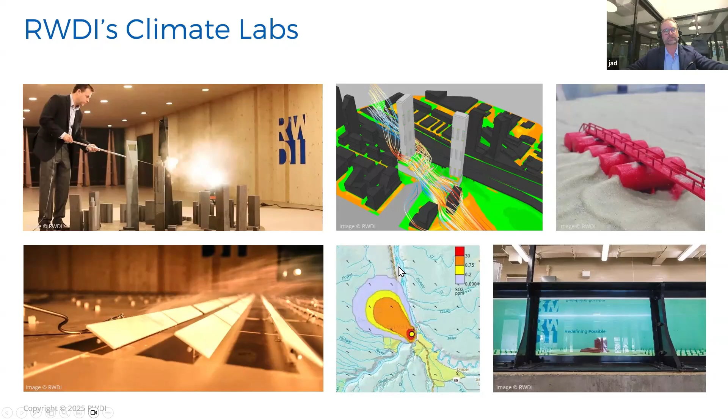Different areas of expertise under RWDI, highly sensitive to topography. This is actually emissions pollutant dispersion being modeled at a beyond the microclimate scale. This is up at probably around 10K by 10K.

We've done a number of research stations there looking at wind and snow accumulation and drift and so forth.

We have offices in Canada, the US, the UK, and Asia Pacific. The wind tunnels, or climate labs, are located in Guelph, Ontario, Canada. There are three of them at that facility, plus a water flume, so four major instruments in Guelph, just west of Toronto. We also have another facility with a wind tunnel to the northwest of the city of London.

That's in Milton Keynes. And then we have one tunnel, and we're building another, perhaps two, in Trivandrum in the south of India. We are working every day of the week all over the world.

To give you a sense of the scale of project work that RWDI does in our areas of specialty, we do thousands of projects per year. Our scope is smaller, narrower, as specialists than say the architectural design or the structural design. We are called upon for our specialties at a variety of places throughout the project, but it means we do a very high volume of projects throughout the year.

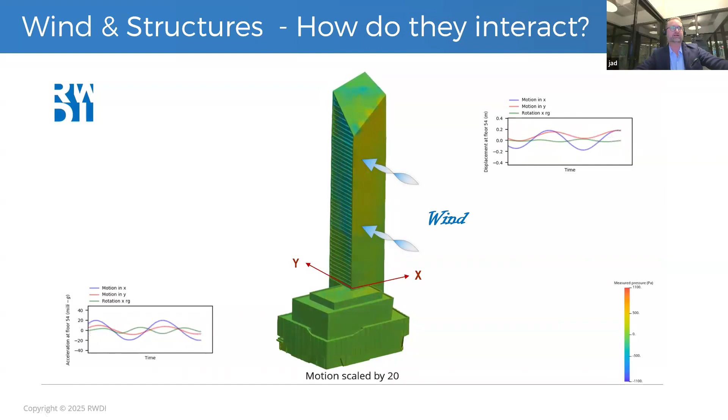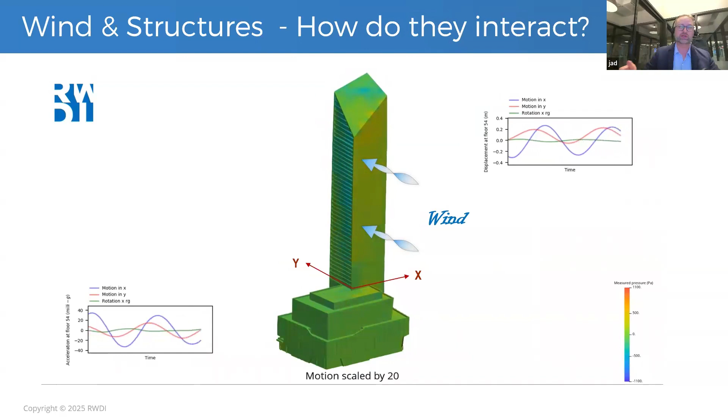This is an image where the motion of the building is actually magnified by a factor of about 20, but it is really important to understand these buildings that we build, they do move. They do experience wind loading. Yes, there's dead loading, yes there's certainly seismic loading, but often, and for many projects around the world, wind loading is one of the critical loading parameters, and it is important to understand the way that it interacts with a structure and the way that the structure will respond to that loading, including that buildings move.

Now, the building code, I'm specifically referring to North American codes here, but it's pretty well true the world over, has guidance for structural engineers on how to assess wind loading or cladding pressures, either of them. It is a relatively generic approach. It is a little bit conservative, and it's important to understand the context where it is most applicable.

It is most applicable in the along wind direction. So wind coming from the left side of the screen, moving towards the right against my structure here in plan view, and you can imagine a code that says it pushes on it and then the building responds. So you get this along wind response.

But for many structures, it is actually the across wind that is the governing load. It is the largest load at the appropriate frequency, and it is the thing that will be most impactful for design. Now, the thing on the bottom here is just a general rule of thumb. I'll show you some other rules of thumb later, but it is most typical that the across wind vibration, the across wind motion and forces are stronger at heights greater than 120 meters.

It can be true that that is lower, it can be true that it ends up higher. It depends on a whole range of factors like the surrounds, the particular climate that you're looking at, the aspect ratio of your particular building. I mean, we have done plenty of work on crosswind dominated buildings that are nowhere near 120 meters tall.

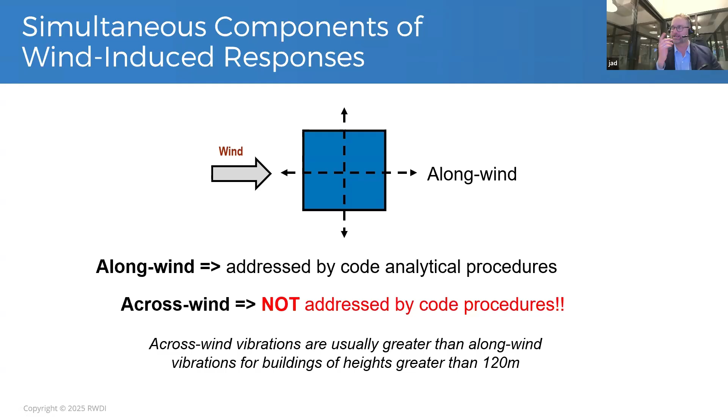But there is a role, I think, for the practicing structural engineer to be thinking about: how much vulnerability do I have here? And does the code give me a good representation of what my building will actually experience? To try and understand what it is that is driving that crosswind response, here is wind coming out of the left.

This is a large eddy simulation, CFD, just for the purposes of understanding the phenomena that is at play. Wind pressure builds on the front side, and you get some positive pressure and displacement in the along wind direction. But what emerges is a vortex shedding phenomena.

As I play the video, you can see the alternating eddies that come off as vortices. What that manifests on the building is actually a stronger crosswind response than an along wind one. So the building is being pulled and pushed up and down on this screen more than it is being pulled and pushed left to right.

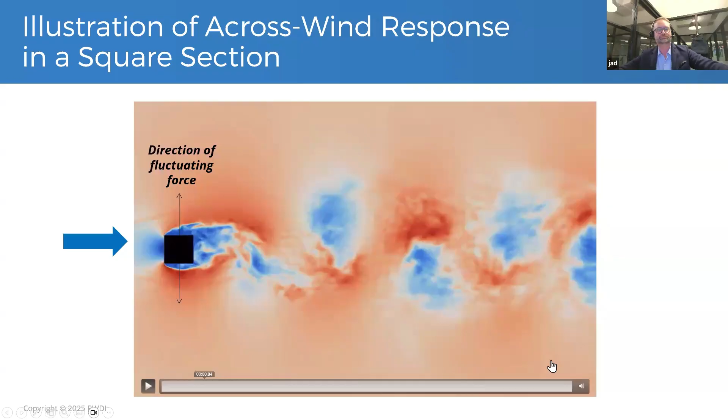To give you a sense of what that looks like when we do an aeroelastic model of it, this is a design iteration of the spire that sits on top of the Freedom Tower here in New York. This was an earlier design iteration, and you can see our tunnels are a little dated here, this is one of our older facilities. The newer ones are prettier, but this is a really, really good video, even if the tunnel looks a little dated.

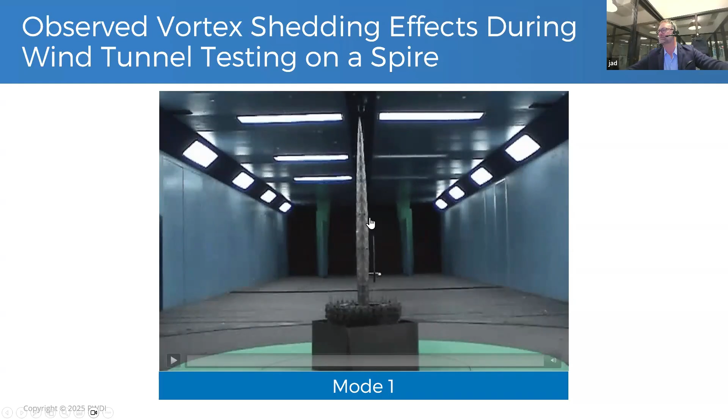So you get a sense of it, I don't know if the audio came through, it just sounded like a wind tunnel. But if it did come through, then that's what it sounded like. That was just a physical manifestation in a non-rigid, aeroelastic model, showing exactly that crosswind response as measured in the tunnel.

So why would we want to conduct wind tunnel tests in order to study these loads? Well, wind loads are notoriously difficult to predict. You think about the compass, there's 360 degrees of potential direction. There's turbulence in the air naturally, so wind passing by is not a pure linear function. You have boundary layer conditions, including the roughness, i.e. the other buildings that might be around your building, or topography changes, etc.

The buildings that we design now in the world are complex in terms of their building shape. There are some rectilinear prisms out there, but there's also a lot of bends and curves and shapes and sails and all sorts of things.

Interference effects from immediately surrounding buildings are important. So if you think back to that image I showed with the vortex shedding, if you are the building that is downwind of said building, you're experiencing the effect of your neighbor.

Complexity of upwind terrain - the terrain conditions are not so complicated somewhere like New York, but if you go to Hong Kong, that's a different story.

Complexity of dynamic behavior under wind load action is a lot about the actual properties of the design and the crosswind response that I showed. There is a lot of inherent conservatism to cover all this risk. The code is inherently relatively conservative, and so there is an optimization opportunity here, in addition to a risk management opportunity.

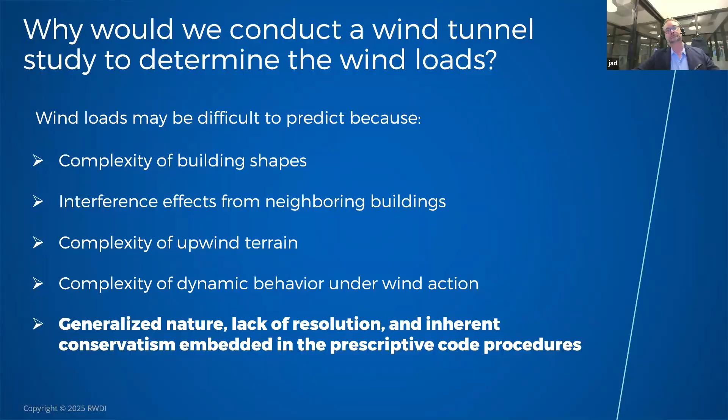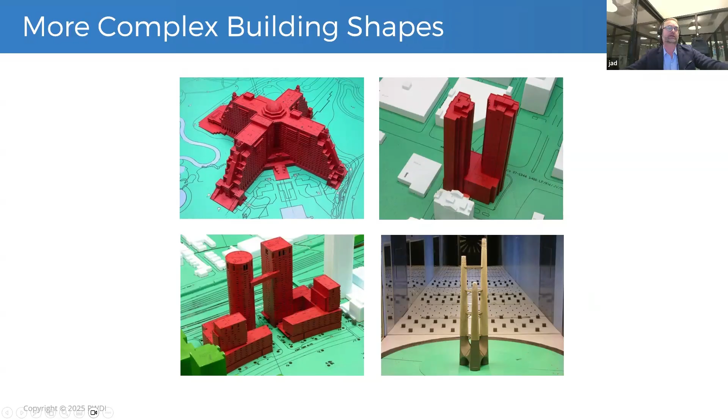We see all sorts of shapes and sizes: bridge interconnections, very squat type buildings, and a lot of pairing of towers coming these days, which may or may not be a singular structure. They can sometimes be completely isolated from one another, although they look like they're together, but these things can interact or not. In the case of the one on the bottom right, that absolutely will interact with one another. So you're really working on a problem with three independent bodies with connection, and their behavior in the wind can be as complicated as you might guess it to be.

All sorts of different shapes - these are again a few from some of our older tunnel facilities, but we've been privileged to work on some really incredible towers, some of which have been built, certainly Burj Khalifa. This one I can tell a little story on, but some of the others, Petronas Towers for sure, and this guy is Atlantis. All sorts of stuff comes through our tunnels. Some of it gets built, some of it doesn't, some of it goes back to the design drawing board.

Burj Khalifa is a fascinating story. Bill Baker was one of the engineers involved, really leveraging the output of a wind tunnel to inform the shape and orientation of the tower.

All of these setbacks built into the tower are mechanisms that, in addition to making for interesting architecture, create different sectionality in how wind interacts with the facade. You're breaking the aerodynamic profile into sections so you get a different frequency of vortex shedding depending on which part of the tower you're looking at. You're essentially confusing the wind, as opposed to something like 432 Park Avenue here in New York, where you have a rectilinear prism with essentially the same cross section regardless of height. So there's serious aerodynamic advantage to this shape.

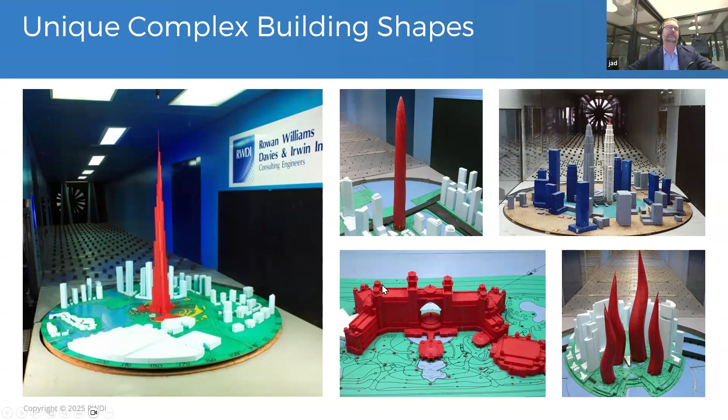Wind tunnel studies we do for all sorts of buildings. We also touch on pedestrian level wind, I'll come back to that, but often we're doing structural wind load studies for buildings, particularly tall or slender ones, and a lot on long span roofs. These are areas where code is often challenging, especially with complex shapes. Architects are increasingly coming up with interesting shapes and sizes, cutaways, overhangs, amenity spaces high up in the air. So the demand for dialed-in structural loads and cladding pressures is becoming ever more important.

Aeroelastic testing we don't do all the time - a lot of our work is based on rigid models. But when you have a highly dynamic building or a particular amenity or feature, like what I showed you on the spire for the Freedom Tower, we will actually build aeroelastic models.

These are models designed to move, but designed at model scale and deployment to have the characteristics at full scale of the structure - things like stiffness, mass, and so forth. We try to emulate the design characteristics at model scale and then test on that basis. All of our bridges, cable bridges, suspension bridges, and even some of the more rigid ones, we will build aeroelastic models for given the potential for movement.

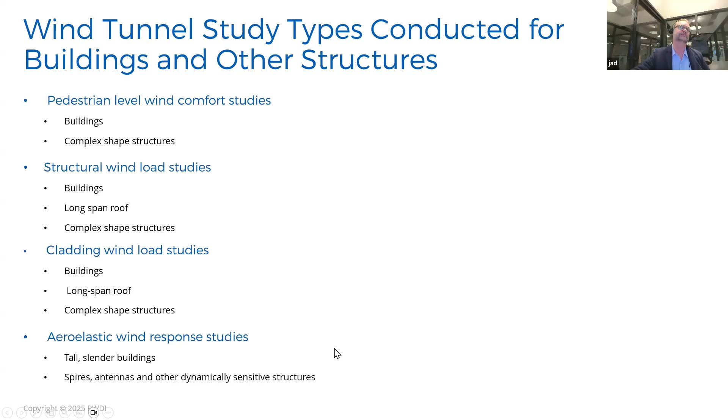The way the wind tunnel works: one of the primary instruments that goes in the tunnel are flexures - a sway flexure and a torsion flexure. Essentially these instruments measure the amount of force being imparted by the wind, and they measure it over time so you get the fluctuations and movement and so forth.

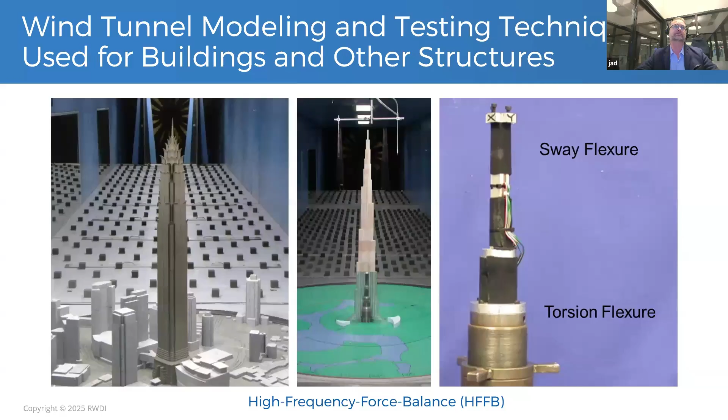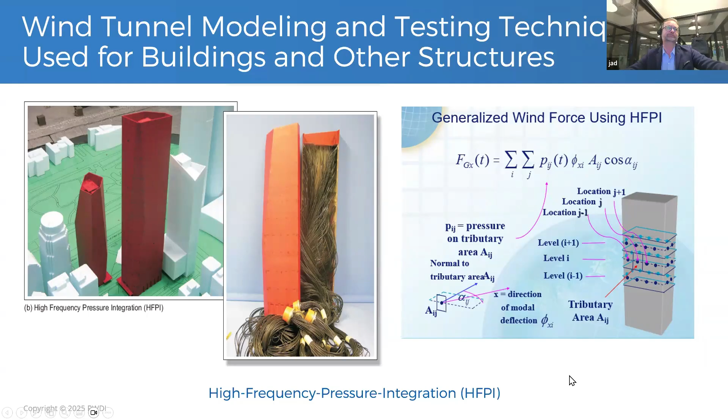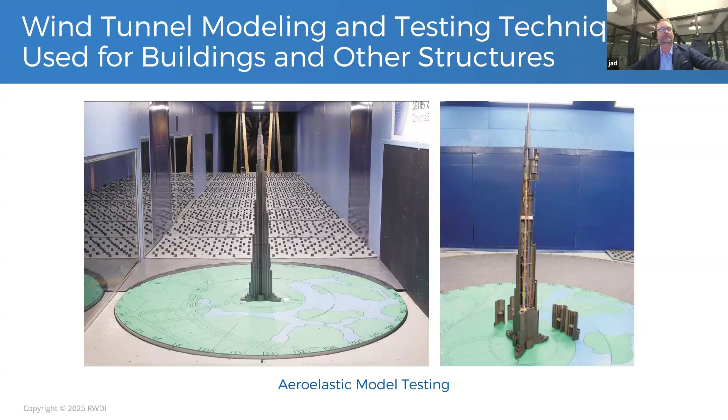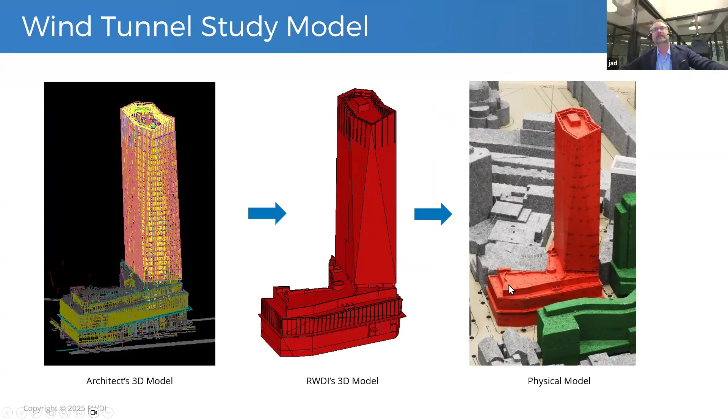Aeroelastic model testing - sometimes we do very large aeroelastic models where we're capturing that stiffness, capturing that mode shape at model scale, and then testing as such. The workflow usually goes: an architect will send us a 3D model. It usually has way more than we need for our work included, but our job is to clean that model and get it ready to go into our model fabrication, where we build the physical model, instrument it, and place it in all of its surrounds so that we can put it in the wind tunnel and do the tests.

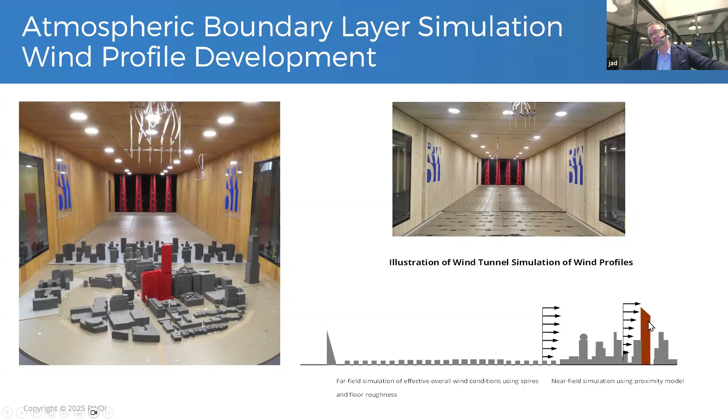That would be different if, let's say, I'm down in the Financial District in Manhattan. If I was any of the towers directly on the water, for the right wind direction on the test, I will want a fairly smooth surface leading up. If I am deep into Midtown, but only have a portion of Midtown on my horizon, I will want some additional roughness to represent, say, the wind direction coming down from Central Park through all of the super tall towers, even if my project is down, say, 34th Street or something like that.

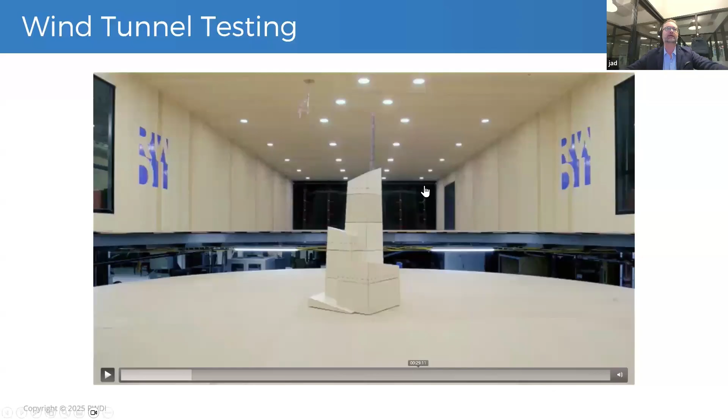This is a model being loaded into our newest and largest wind tunnel - a 24-foot tunnel. The disc that you can see is fabricated beforehand. Sometimes it'll have buildings, sometimes we're studying something in isolation. We're loading it into the wind tunnel from below, and the fans or the wind will originate from the end of the screen. Then we'll be able to spin the disc as we look at all the different angles of study.

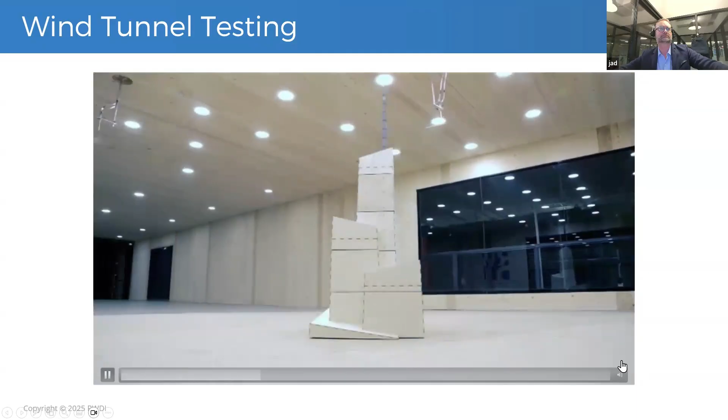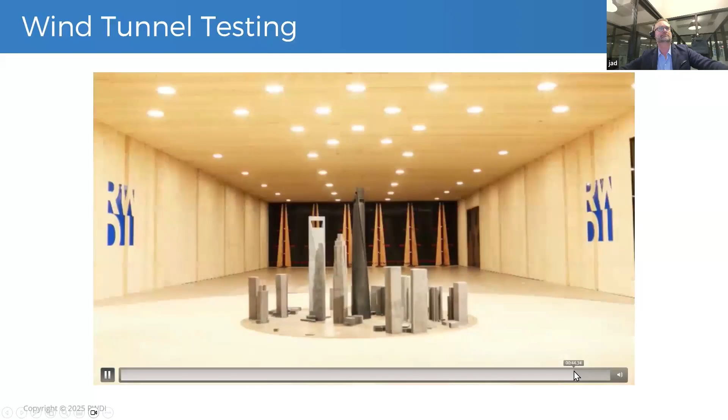A summary of the steps involved in a wind tunnel test: it's assessing the surrounding terrain, understanding what the profile should look like. It's evaluating the local wind climate - it matters what directions the wind comes from and how often, in addition to how strong that wind is likely to be. We build physical models, sometimes aeroelastic, sometimes rigid, of the specific building itself. We test it in the wind tunnel, going all the way around every time. We record and process all of that data, and the raw data that comes out is massive - massive data files - but we have to compute them all down into things that are tangible and usable by the teams we're working with. And we have to be able to communicate what it is that we do.

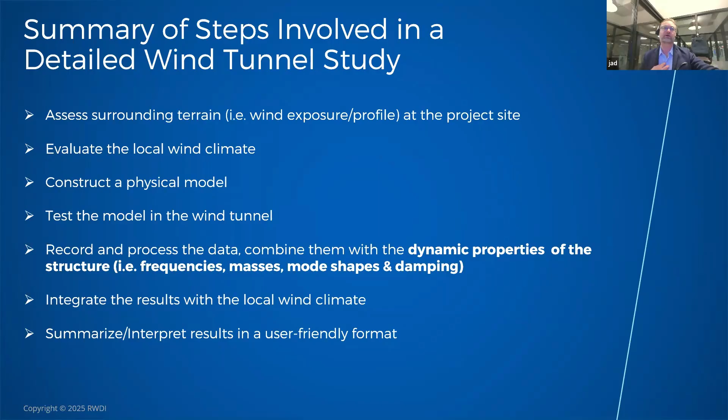There are a lot of structural professionals, developers, architects, etc., who are familiar with wind tunnels and wind tunnel work, but there's quite a few who are not. They have to learn how to work with the material that we provide them, and we have an obligation to provide it in a friendly format that they will know what to do with.

Typical parameters - we certainly talk about forces and moments and things like that, but we also increasingly talk about serviceability criteria. That means, what is it that we are expecting to provide for the building occupants? Knowing that these buildings will move, what is an acceptable amount of movement and how does it express itself? The most commonly used motion comfort criteria, serviceability criteria, are measured in milli-g's for residential, hotel, and office types.

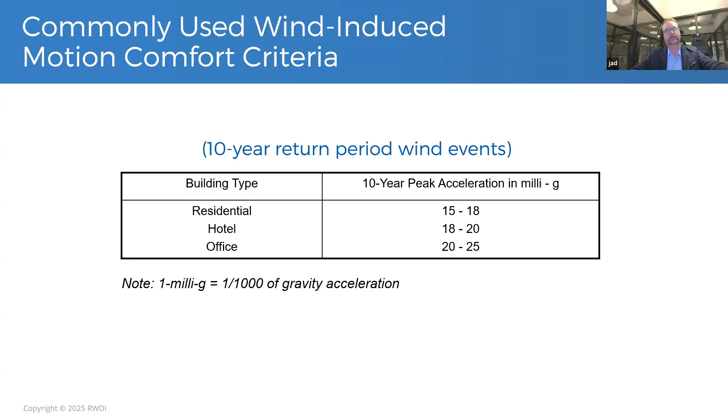Increasingly, there is an emphasis not only on the 10-year event, but to have a more frequent threshold. So one of the sets of criteria that we recommend is a 1-year event that's consistent with ATC Design Guide 3, but looking not only at the 10-year serviceability, but increasingly at the 1-year. In some projects, we actually look at a more frequent parameter than even 1 year.

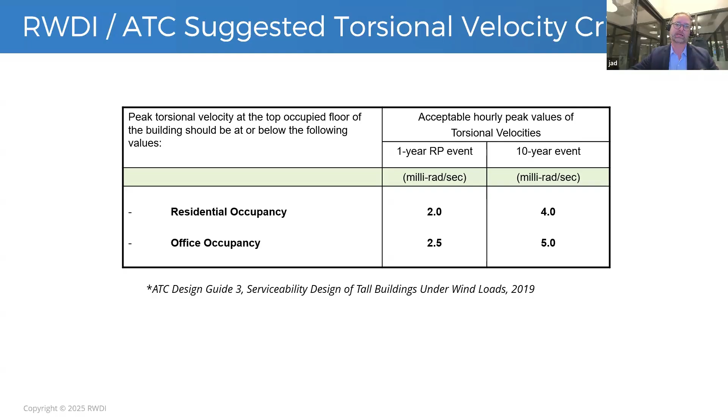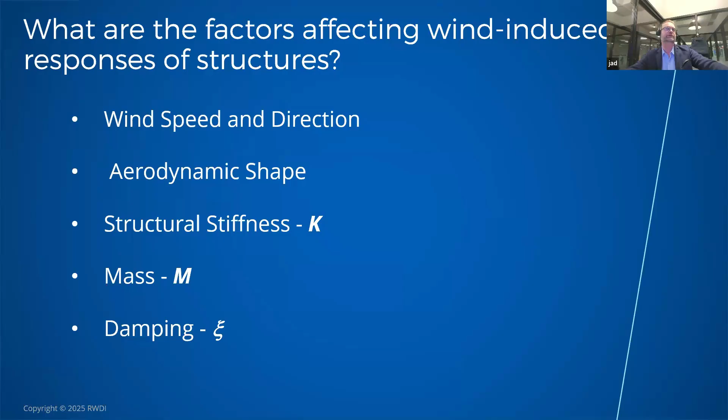Factors that affect the wind-induced response certainly include wind speed and direction, the shape, all those things. To do our work, we accept from the structural engineer the stiffness of the tower, its mass, mass distribution, damping, mode shapes, etc. And we use those to do our analysis and provide feedback.

If you want to shape your building aerodynamically, what are some features you might use to drive down wind loads or mitigate serviceability issues? Physically, you can do things like slotted corners, chamfered notches, tapering towards the top, which Burj Khalifa had, along with breaking up the nature of the shape. Enhanced surface roughness, porosity—432 Park Avenue has wind pass-through floors, which again breaks up the sections that would experience vortex shedding. Added porosity, sculptured building tops, etc.

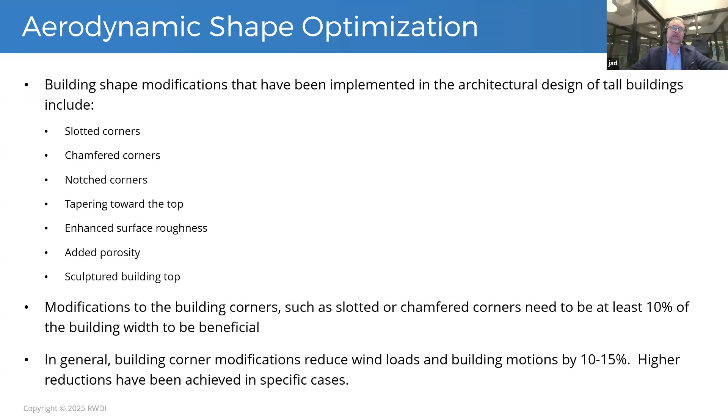Now, to do aerodynamic shaping well, usually these have to be significant motions. Little things like fins that are primarily there for solar shading aren't going to do a whole lot in terms of the building's structural load itself. Usually when you're using these sorts of moves architecturally, they need to be significant in terms of their proportional size and scale. But they can be impactful, and there's a lot of work that goes into chasing the most optimal solutions.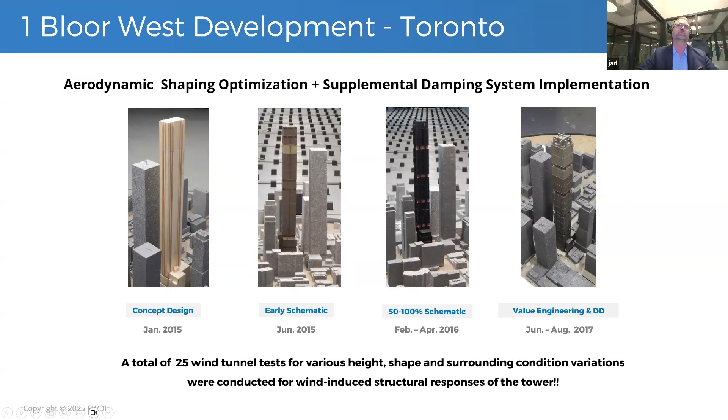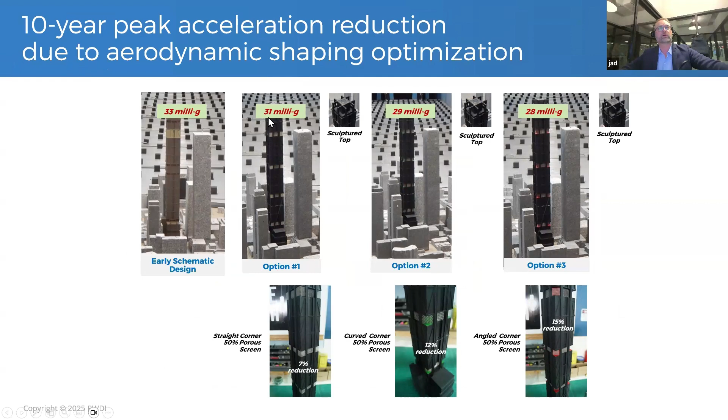Ultimately, this is a project that knew early on it was going to have supplemental damping involved, originally conceived as a TMD, a tuned mass damper. If you compare the size of the damper required depending on the serviceability options, the architectural shaping, that damper would have had to be a little over 1,000 tons, then 700 tons, and in the final design only 600 tons—which shows up as substantial savings when you go from that size down to that size.

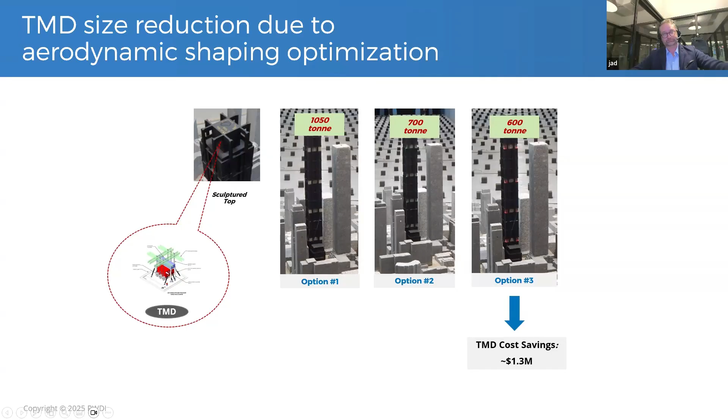So the final integrated design is closest to option number 3.

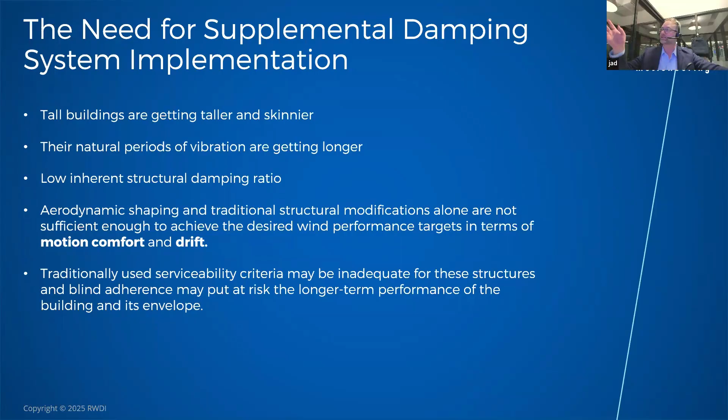A little more on supplemental damping, and I'll be relatively brief: tall buildings keep getting taller, they keep getting skinnier, their natural periods of vibration are getting longer, and they have low inherent structural damping ratios. Aerodynamics are becoming more and more important, and they have to get into the right combination of motion and drift targets and serviceability criteria, which may be inadequate for these structures. You need to be thinking about the long-term performance of them, and that's part of why we've been working with not only the 10-year standard that's been around for a while, but also the more recent 1-year.

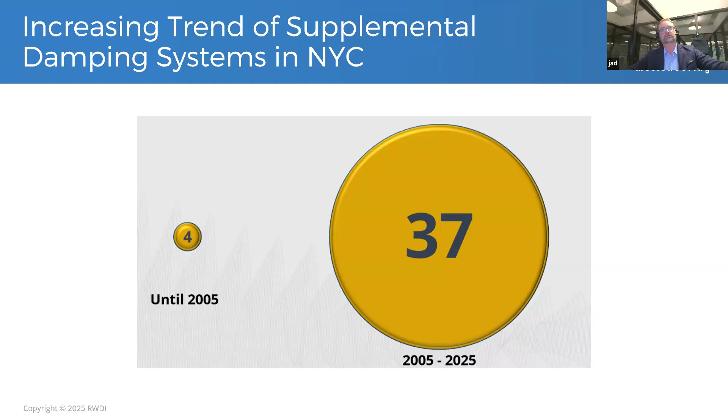To give you a sense of adoption of these things in tower design, just in New York City alone—let alone the rest of the world—up until 2005 there were 4 supplemental damping projects on buildings in New York, and since then, over about 20 years, there have been 37. If you're looking from Central Park South, you can see—and this isn't all of them, there are more than just these—many of the tall towers built in New York now have a supplemental damping system.

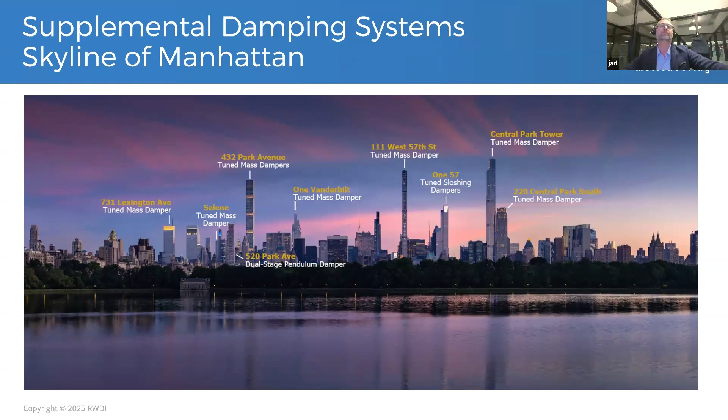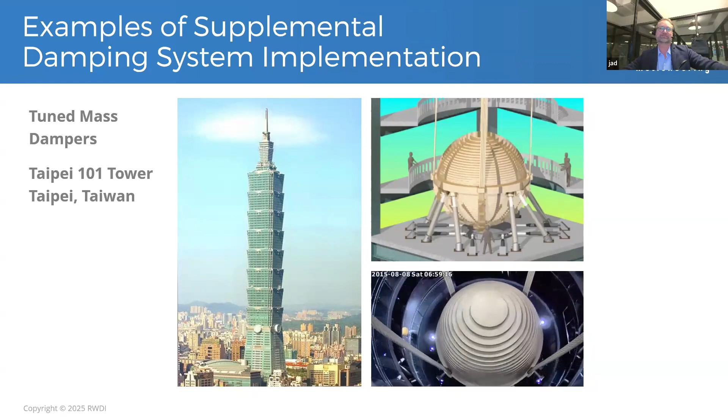In the case of Taipei 101 and Shanghai Tower and a couple of others, these can also have a fantastic additional feature, which is they're a building amenity. People pay to go see the damper, and now they're looking at the pendulum swinging. Some days it moves very little, some days it moves more, depending on how windy it is—but it's also an economic opportunity for the project.

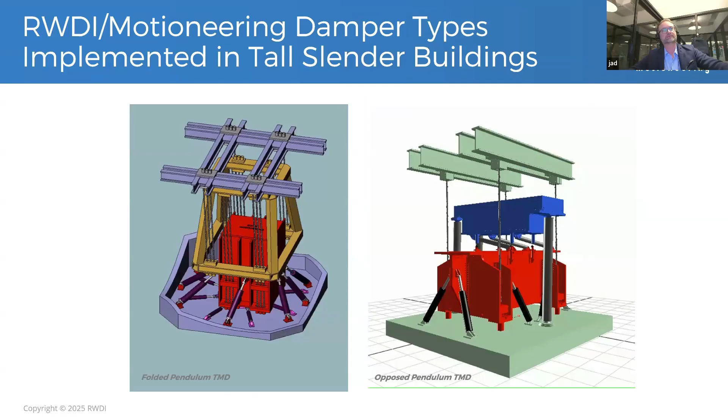There's a whole multitude of different types of designs of these things. A very unique damper inside of 432 Park Avenue—or pair of dampers, actually—but the dynamics on that motion get very complicated. There's a bit of a rendering of it here.

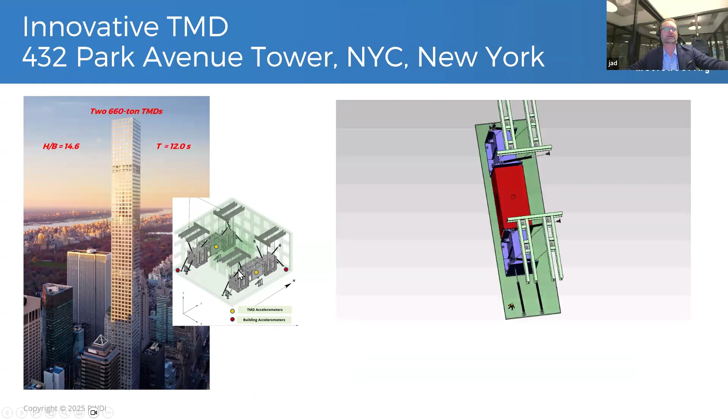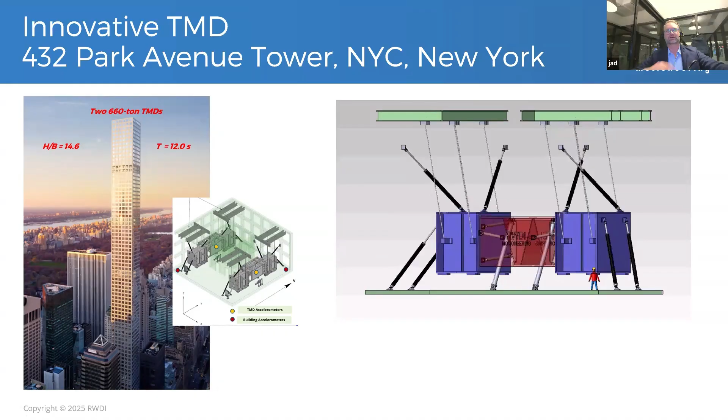As the building moves, and even the earlier slides I was showing with the along wind and across wind, buildings actually start to move in more of a combination mode. It's not just linear, front and back or left and right. They do start to rotate.

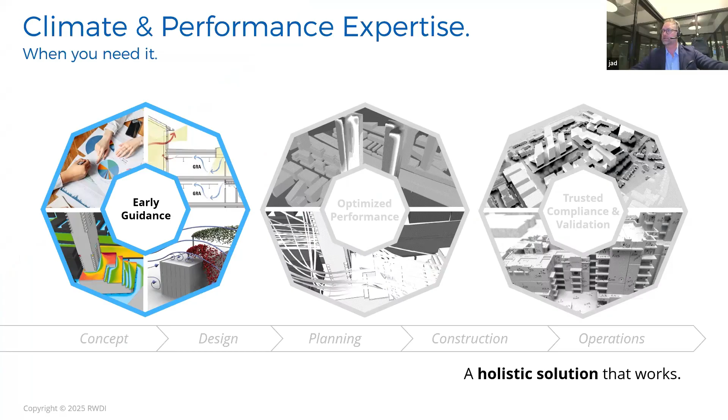So that was supplemental damping, very much like the traditional areas of RWDI practice. I wanted to give you a sense of some of the innovation we're pursuing, particularly in the realm of computational tools. Everything up until now is established engineering, highly coupled to physical testing, but there's an emerging role for rapid guidance on these things, and that's where the computational tools are finding their utility at the beginning.

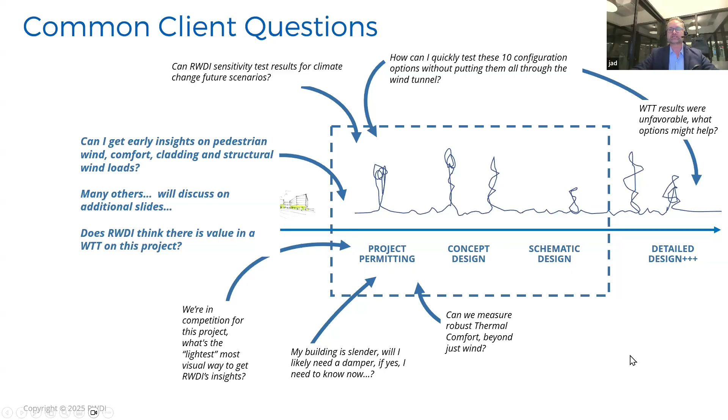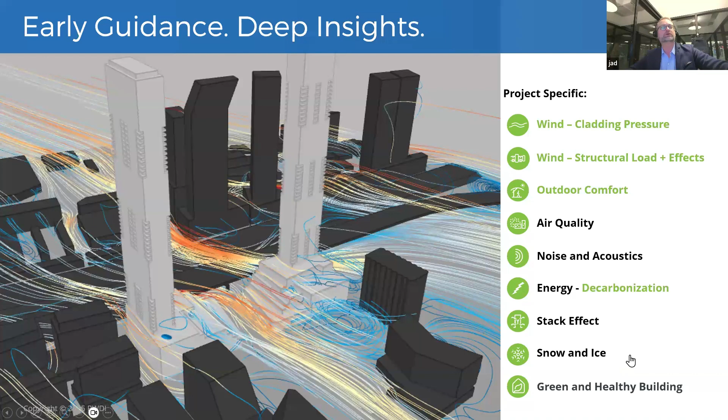We get asked by clients all the time, can I get early insights on pedestrian wind comfort, cladding, structural wind load, when the project is only in the concept design phase? At that early stage, the pace of design and the client's willingness to pay for detailed wind engineering studies isn't great. They're looking for quick guidance early on, and that's where computational tools are finding their greatest utility. So I'll touch briefly on tools we've developed for cladding pressures, structural load, outdoor comfort, and a little on decarbonization.

But these are two primary methods and they have different strengths and weaknesses. Increasingly there are AI models that can do this, and we've been training our own machine learning models based on data sets. I'll show you that in a sec. But what's absolutely critical in our line of engineering is that all these tools have different strengths and weaknesses - we need to be able to truth them back to some measure we can calibrate against. For us, that's often the wind tunnel, for which we have correlation to the real world.

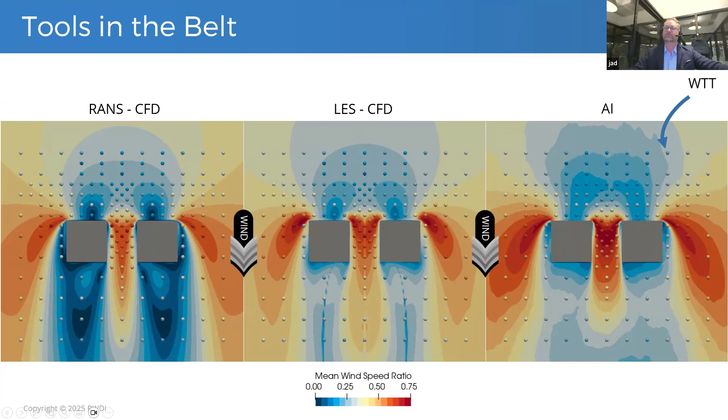For us it's absolutely critical to understand the strengths and weaknesses of these technologies in order to use them in our practice, knowing that the wind tunnel remains the gold standard for assessing this phenomena. We trained that machine learning model based on our wind tunnel data, also through some of our computational fluid dynamics results.

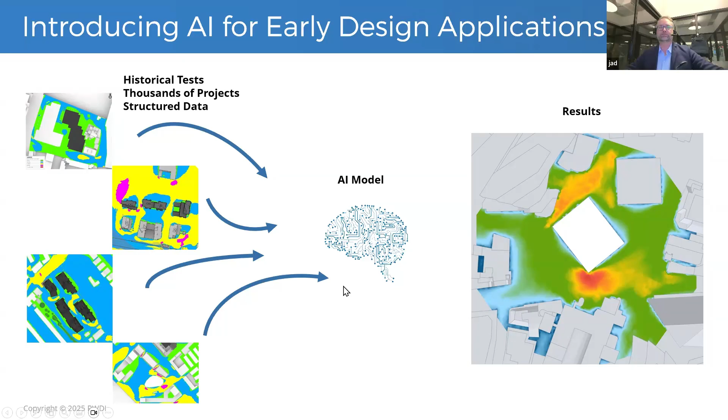Here's a plan view of an AI model output of pedestrian wind - wind in the ground plane, where you have corner acceleration of wind moving from left to right coming around that building. Same thing, a little channeling back there, areas of stagnation in blue, quiet wind speeds. But this AI-based prediction is actually quite good - it looks like CFD. If you didn't know it was AI, you'd probably guess it was CFD. It doesn't look like a wind tunnel test, but it's staggering how quickly we've been able to build this engine and leverage the science to produce results.

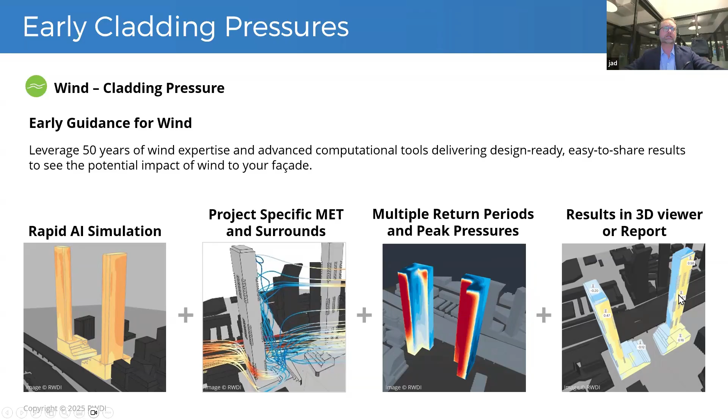In application, this is early design for cladding pressure - a rapid AI simulation predicting pressure coefficients, positive and negative, on the facade to inform the facade design. It's inclusive of all the same things you'd have in a wind tunnel test, the project-specific meteorological data and all the surrounds. We do multiple return periods, 50 years, whatever's needed for those pressures, and can map out results in a 3D viewer. Really useful for clients trying to understand the benefits or challenges of various shapes of an initial tower - where am I going to have hotspots, how big a magnitude of pressure hotspot might I have. But there are some limitations to it.

We need to be communicative to our clients about the trade-off here between the accuracy of an AI model relative to a wind tunnel. They're not the same. You cannot use these for final design and engineering. They're useful for early design guidance only.

They're not terribly sensitive to smaller, more nuanced moves. If you move the tower by 5 degrees, it probably isn't going to produce a substantially different result, where you may have a stronger result in a wind tunnel. So for the future, we're thrilled about where this technology is and where it's going. We see it as useful in early design now, but it is not a replacement for a wind tunnel.

We will continue to expand the training data sets. We have thousands of projects in here, but as I said, we do thousands of projects per year, and we've been running wind tunnels for 50 years. So we've got a lot of data to go mine the lake and continue to refine these tools.

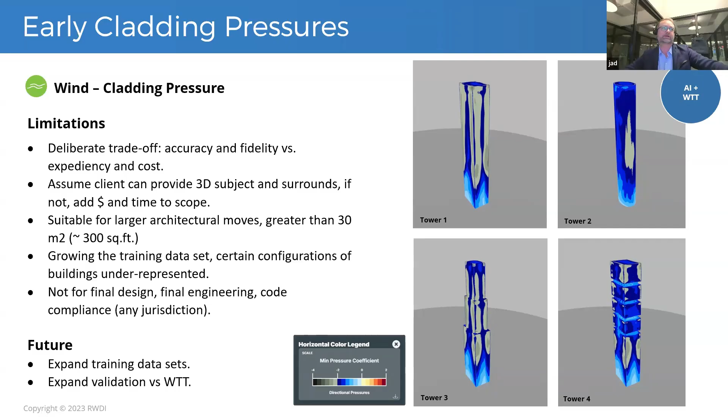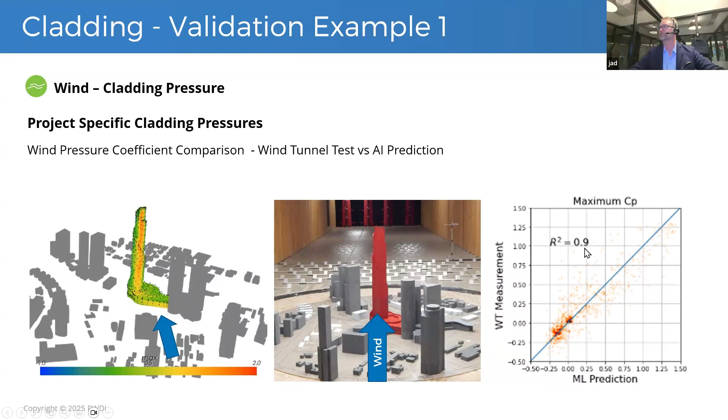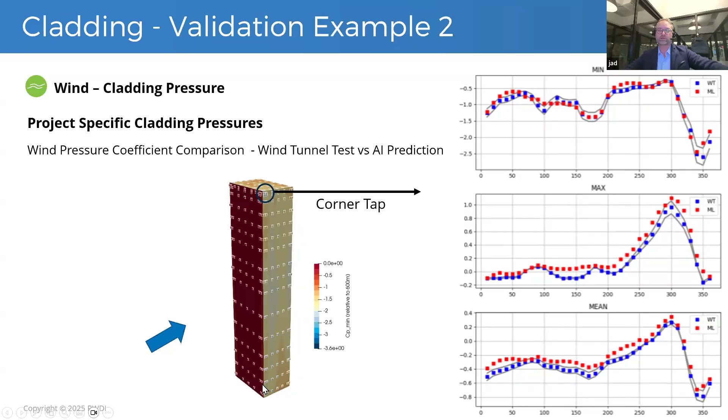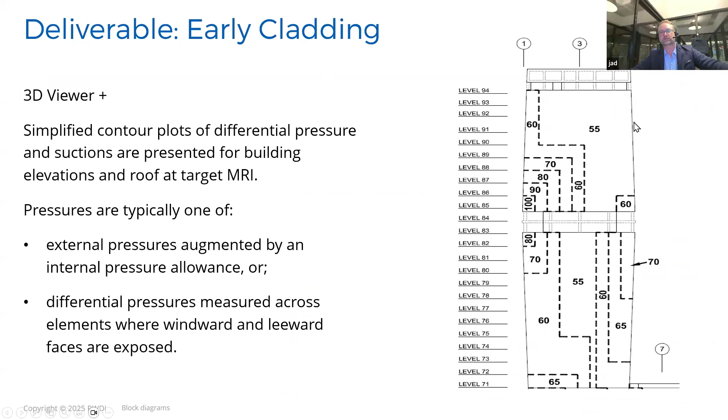So that was cladding pressure. Now I move into structural wind loading. We often get the question from a client: do you think there's going to be value in a wind tunnel test on this project? We know from surveys of the projects we've done in the past that there is often an opportunity to be below what the conservative code would tell you. But it's very difficult to hang your hat on it early in the project.

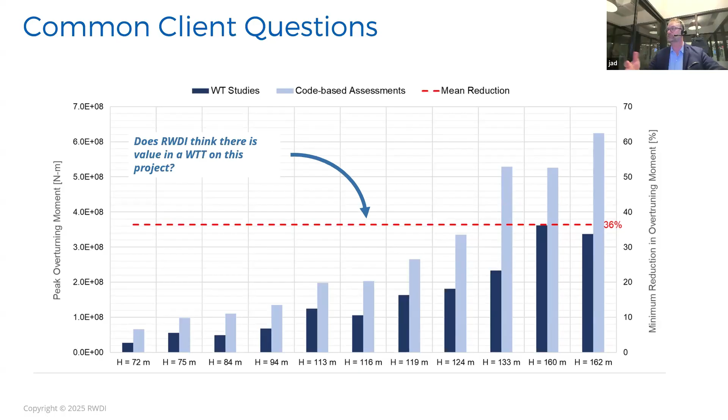Now with a computational tool that is a little lighter, a little faster, we're able to give confidence to clients. If we measure this quickly computationally and tell them this is a good candidate for a wind tunnel test to generate savings, that's a real advantage in terms of optimizing the project for a client.

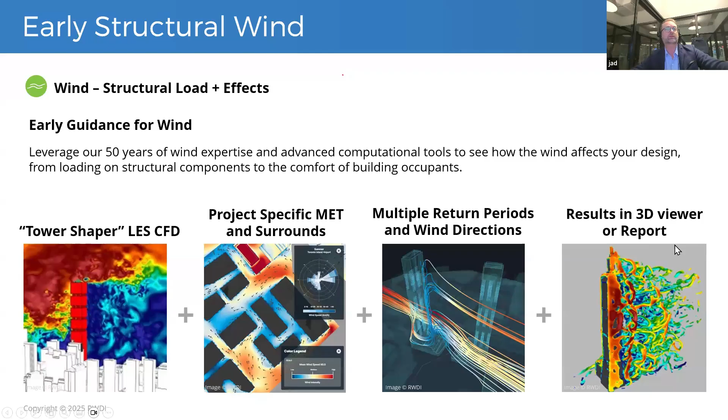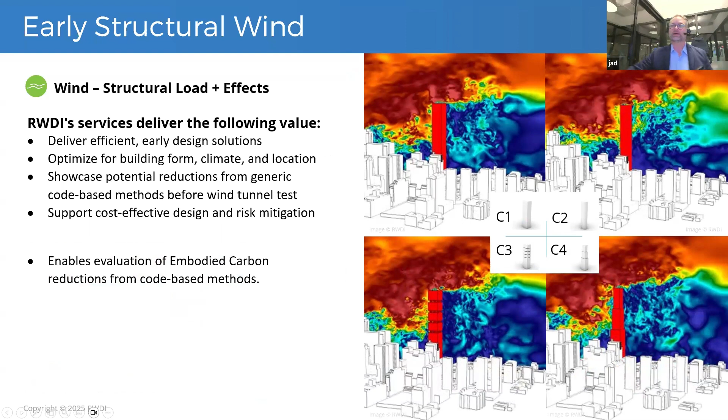The method uses LES, large eddy simulation, CFD, and includes all the other characteristics you would normally find in a wind tunnel. It is particularly useful for measuring initial shapes. So this is tower shaping with early design, C1 config, C2, C3, C4, being able to quickly give guidance back to a project team about what those high-level characteristics are.

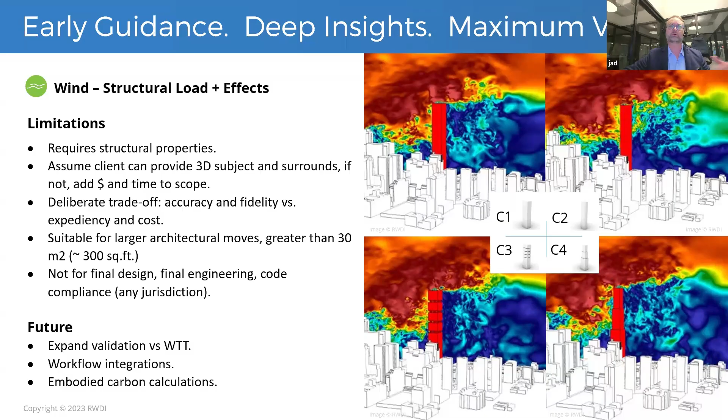There are limitations here as well. It cannot be a substitute for a wind tunnel test. You still need a wind tunnel test for final design, final engineering, etc. We continue to refine these models, and we continue to work on how to integrate them into the workflow, but they have limitations in terms of their sensitivity, etc. But in pairing, they can be very useful.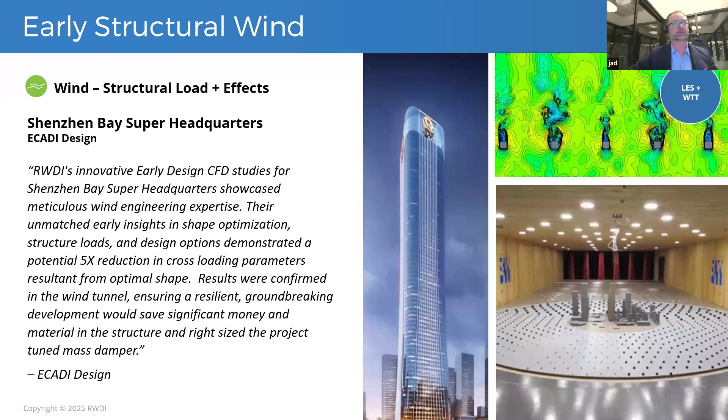And then you can see the design solution that was chosen that has these rounded corners. You can immediately tell just by looking at the computational wakes, this building is far more aerodynamic than that one. And so that optimization then plays out in the wind tunnel, and it affects all sorts of things to do with the structural design response, including, like back on my One Bloor example, the size of the tuned mass damper that went into the top of the tower.

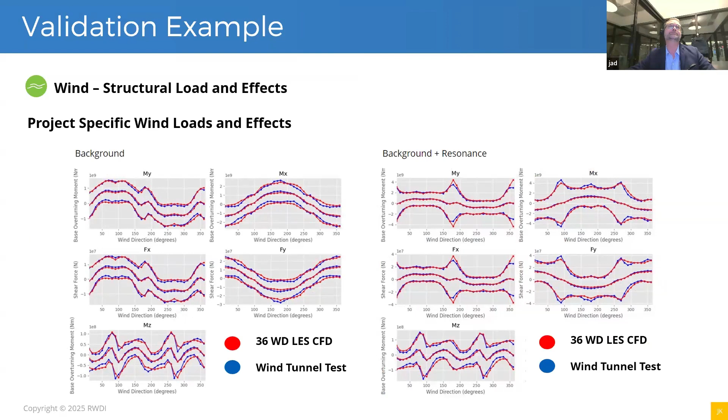We do a lot of work to validate our computational work, and this is absolutely critical. You have to know what you're doing with CFD and computational works. You have to know the strengths and weaknesses because there are many. But it's the same criteria that we're evaluating against, so forces, moments, serviceability criteria, including accelerations.

Increasingly, embodied carbon is a critical variable. So for 20 plus years in North America, we've been tackling the operational carbon, i.e. the energy use, but increasingly projects are being required to think hard about the embodied carbon that is associated with the design and construction of the project. And it can be a substantial portion of the total carbon budget affiliated with the project.

Now, the traditional way that design teams will look to tackle embodied carbon is things like low global warming potential refrigerants. They'll look at material substitutions, so substitutions for Portland cement or low carbon embodied carbon steels, etc.

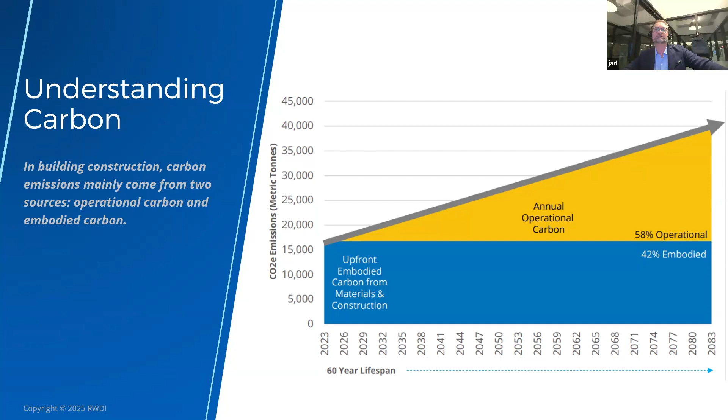So we've developed a simple method to be able to estimate that. So we get one design, we compare it to another, usually the code-based design, and then we're able to quantify what is the reduction, rough order of magnitude in embodied carbon associated with that design alternate versus its code comparator.

If you do that from a variety of project scales, Shanghai Tower on the left, the combination of the amount of shape, the twist in the tower, and its orientation yielded substantial material cost savings. I mean, it's a big, expensive tower, so $60 million is a lot, but it's also a big, expensive project. But it is a substantial amount of embodied CO2 savings, in this case, 20,000 metric tons.

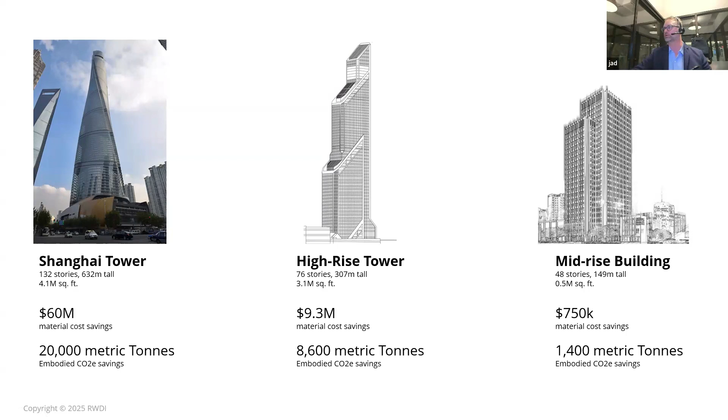The same pattern plays out, but it scales a little bit in high-rise and mid-rise buildings. And this is just embodied carbon reduction associated with having the optimal loads, like the project-specific loads.

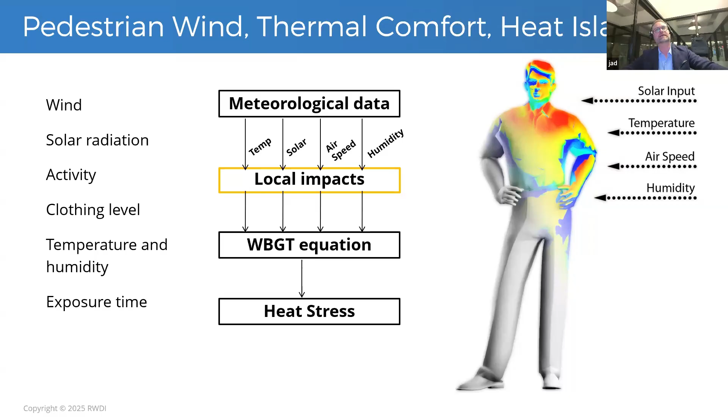Outdoor comfort as a bit of an extra piece here. So while we're doing a lot of our wind engineering work for structure and cladding, we're also looking at pedestrian wind thermal comfort and increasingly heat islands. So the shape of a building can have an enormous impact on how you will feel and experience the outdoor realm of the space. And we see a lot of buildings now with activated exterior amenities.

So there's a lot of simulation wind tunnel test work that goes into this. We're combining temperature, humidity, full met data, full wind flow, sun shadow, and what we're deriving at is total comfort.

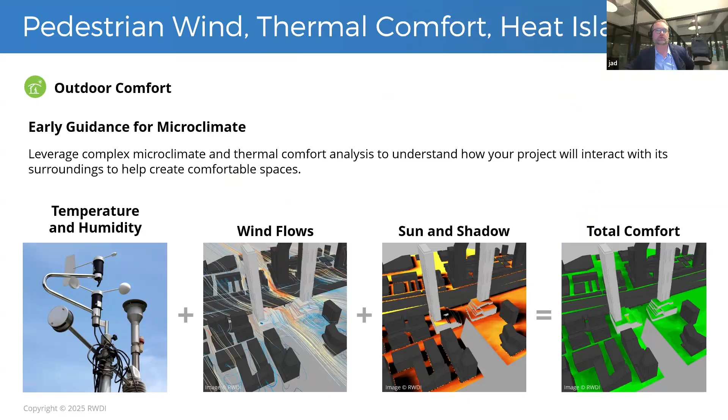We do this in a couple of different flavors. We do AI, we do RANS CFD, and we do LES CFD. Typically, the AI is best for the really quick estimation of thermal comfort or pedestrian level wind. And then when you have potential for safety concerns, we're almost always going up into the large eddy simulation CFD type. But there's a few spots around the world where the RANS is required for regulatory purposes.

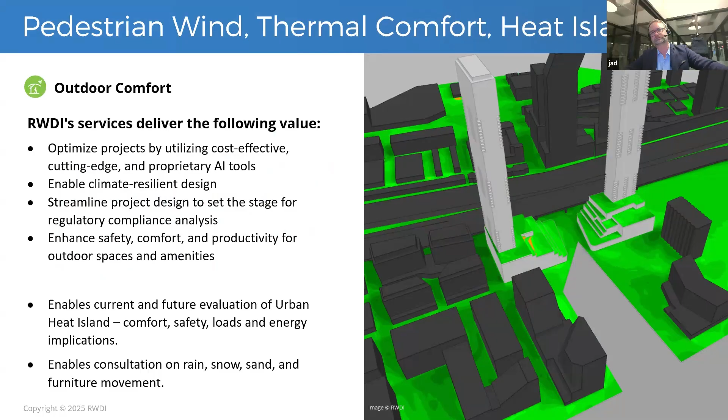So that brings me to the end of the presentation, and I thank you very much for your time and attention. I'd be happy to take questions.

I think we have perhaps 20 minutes on the agenda, and can certainly do that. But maybe to conclude, we're a very specialized firm. We do really, I think, fun and interesting stuff. I hope I've given you a sense of that today. We're very privileged in that the handprint of our work, like the number of projects around the world that we touch, is very, very large, and considerably larger than the size of our organization when we measure our own footprint. So it's a point of pride for us, and something we enjoy very much.